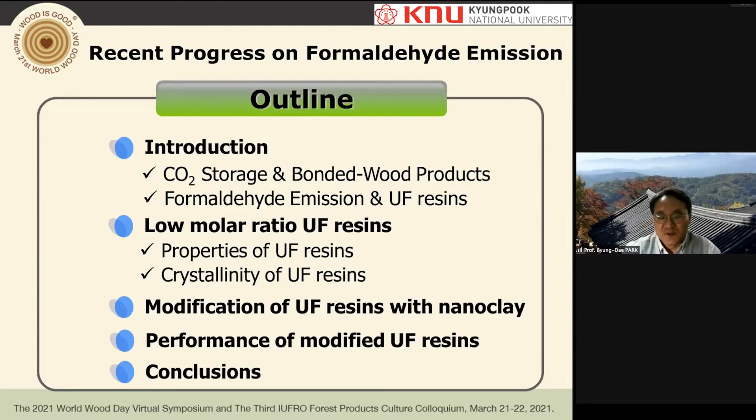Everybody knows wood contains carbon dioxide. This graph shows the net carbon dioxide life cycle emission for different materials, which include wood, minerals, and metals. As you see here, all the metals have much higher carbon dioxide life cycle emission, and minerals are a little bit smaller.

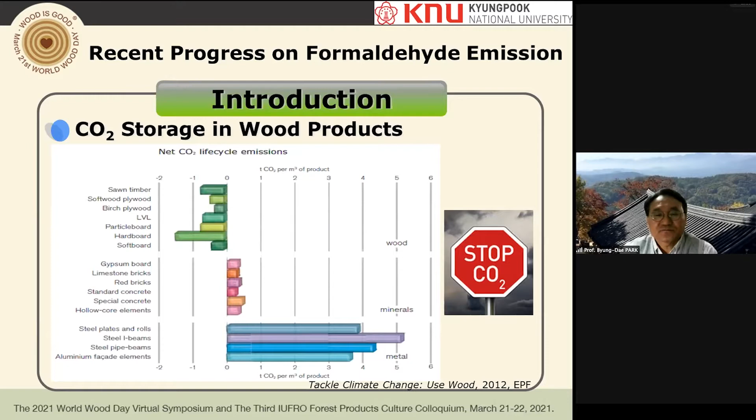But all the wood products, which include sawn timber, softwood plywood, birch plywood, laminated veneer lumber, particle board, hardboard, softboard, are all negative numbers. That means they contain carbon dioxide in these products, which may help mitigate climate change in the future. So why are we still using adhesives?

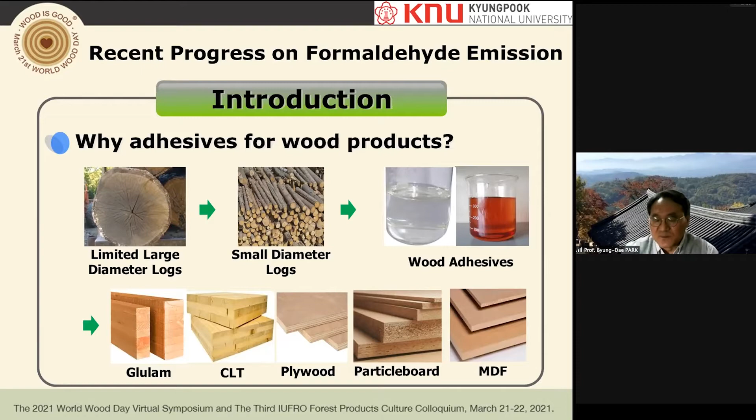As you know, we are limited in large diameter logs, and we have a lot of small diameter logs available for making products. In that case, we need adhesive to bond small pieces together into big products like glulams, cross-laminated timber, plywood, particle board, MDF, those kinds of things.

So where do wood adhesives come from? I guess everyone knows most wood adhesives are based on formaldehyde resins. They are petrochemicals. First, I want to focus on the UF resin, which is a product of reaction between formaldehyde and urea. This is mainly responsible for the formaldehyde emissions.

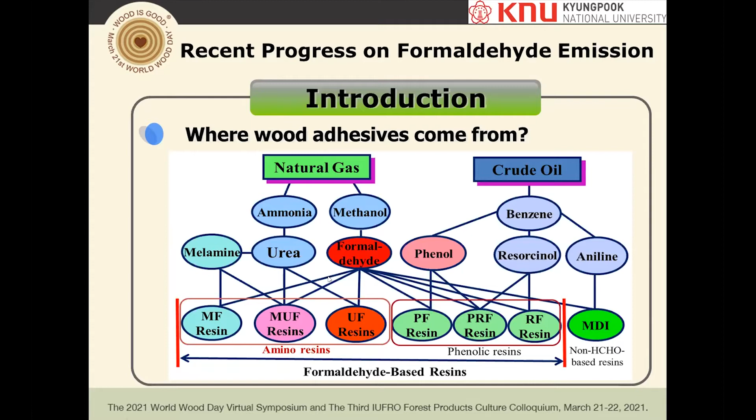As you may know, this UF resin was synthesized in 1884 by Holzer, a long time ago, and then commercialized, and it's been used for more than 100 years. The wood product industry still uses UF resin. Why? Because UF resin has good performance. They have good adhesion strength and also fast curing. They are inexpensive, and also colorless.

But there are some disadvantages. One of the critical disadvantages is formaldehyde emission, as everyone knows. Also, UF resin bonded products have low water resistance and low durability. That's why UF resin bonded products are mainly used for interior applications. Today, I'm going to mainly focus on the formaldehyde emissions of these products.

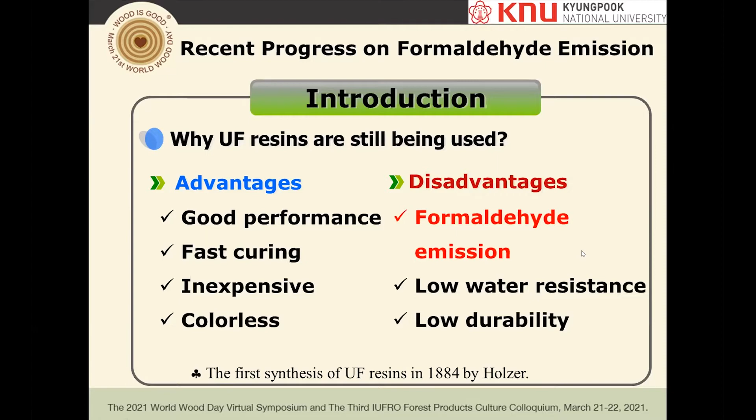As you know, formaldehyde emission goes on a very long time. As you see here, emission goes more than 500 days, which is much longer compared to other volatile organic compounds. There are many different approaches to reducing the emission, including synthesis control, I mean, how you cook the resin, and you may play with the formulations.

You can also have a low formaldehyde to urea molar ratio. Sometimes you can use scavengers, such as dry urea or urea solution, or you can use post treatment chambers like ammonia chambers. But today, I'm going to mainly focus on low molar ratio resins.

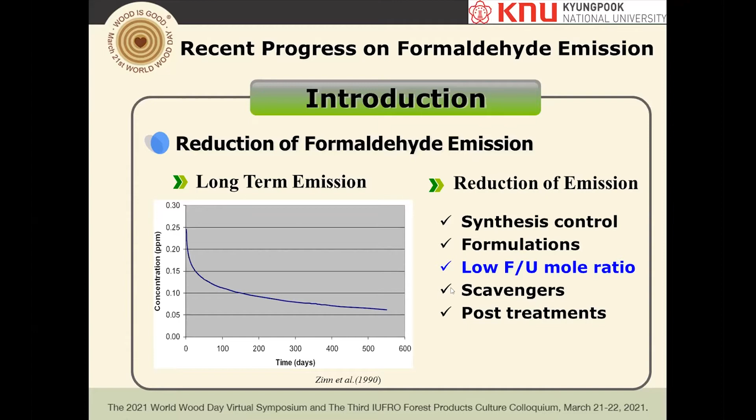What we did is we prepared films of the UF resin and then cured them at different temperatures, for different molar ratio resins. As expected, higher molar ratio gives much higher hardness compared to the low ones.

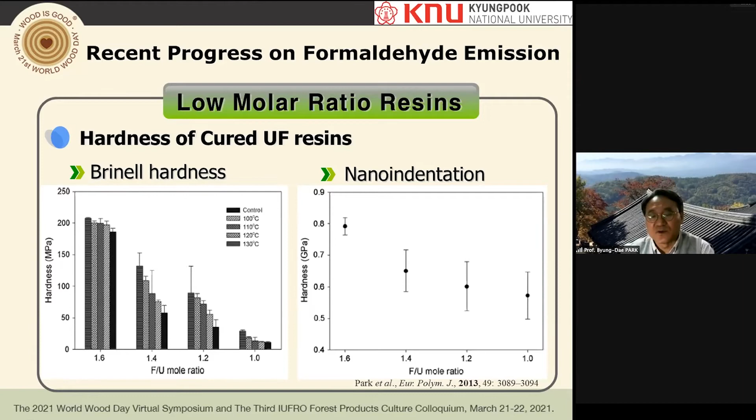Low ones usually have the lower hardness. And then we also did, sorry about that, nanoindentation. I did also nanoindentation on the same films, and then we have the low hardness for the low molar ratios. That means when you have a low molar ratio, you have a low emission, but you have soft material at the end.

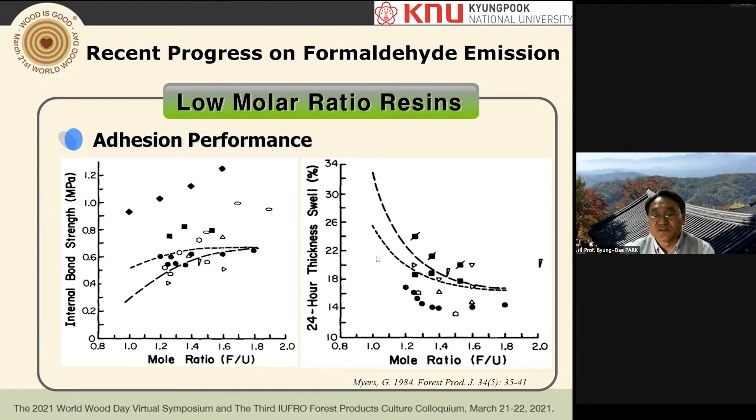And then we look at the hydrolytic stability, I mean, how the UF resins are hydrolyzed at the different molar ratios. So what we did is we prepared the different UF resins depending on molar ratios, and then cured them and then ground them into powder, and then we have different particle sizes, and then put them in the hydrochloric acid for artificial hydrolysis, and then we measure mass loss and liberated formaldehyde concentration after the hydrolysis.

And then we question why, and then we look at the XRD, X-ray diffraction. As you see here, the low molar ratio resin 1.0, 1.2 is much more crystallized compared to higher molar, which are amorphous. And then we calculate the crystallinity of these resins depending on the molar ratio. About 1.0 molar ratio has about 48% crystallinity. That means almost half of them is crystallized, the other half is amorphous. And also the crystal size increases when you have low molar ratio resins.

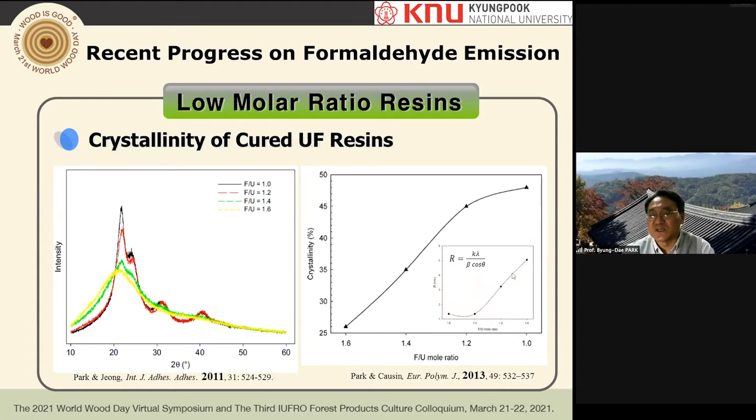And then we also look at the morphology of the cured UF resins by preparing two parallel plywoods using the adhesion between them. And then we split them in half, and then we look at what was going on in the cured resins in the wood. And then we found the different types of crystal structures in these resins in wood.

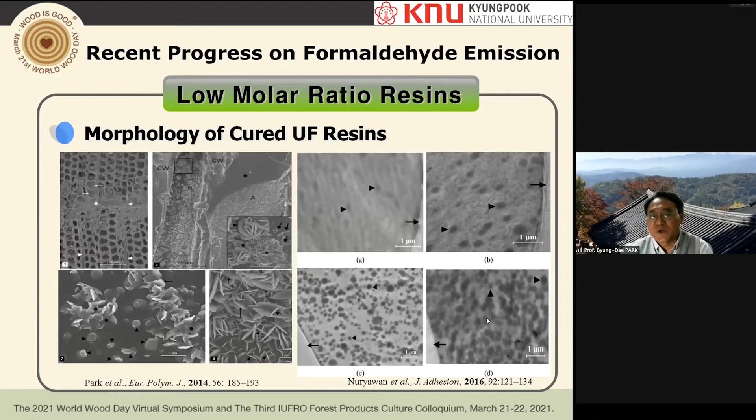And also we did look at TEM. This is high molar 1.6, this is 1.0. 1.0 low molar has much more dark spherical particles. I believe these are responsible for the crystallinity of the low molar ratio resins.

And then we look at these resins with XRD, with wood, without wood. They're pretty much the same crystal patterns, and with wood, a little bit smaller size. And then we also did the electron diffraction, which gives a different number of rings, which means these crystals are polycrystals. I mean, different types of crystals are combined together at the same place.

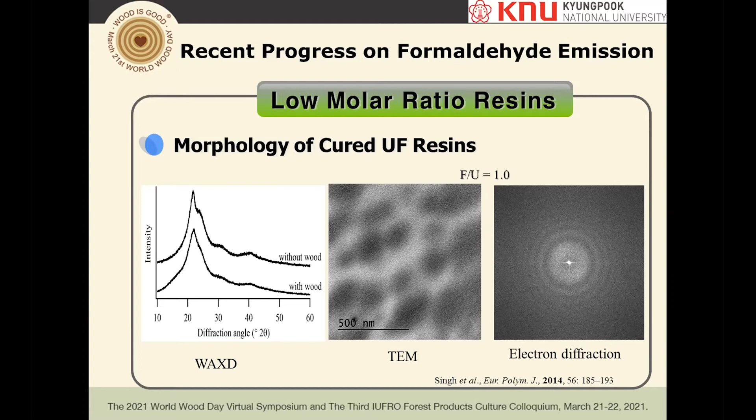So, recently we did the AFM and the TEM to look at the morphology of cured resin. As you see here, left-hand side, AFM shows pretty much the lamellar crystal structure for the low molar ratio resins. We also confirmed the lamellar structure with the TEM. However, the high molar ratio resins are pretty much amorphous, shown by both AFM and TEM. So that means the low molar ratio has crystal structures of lamellar types.

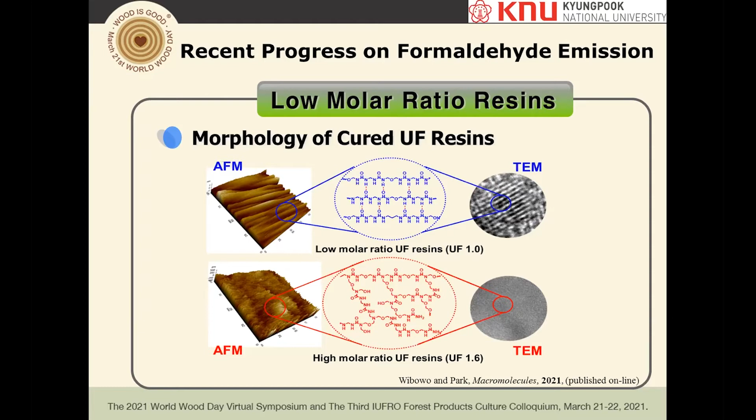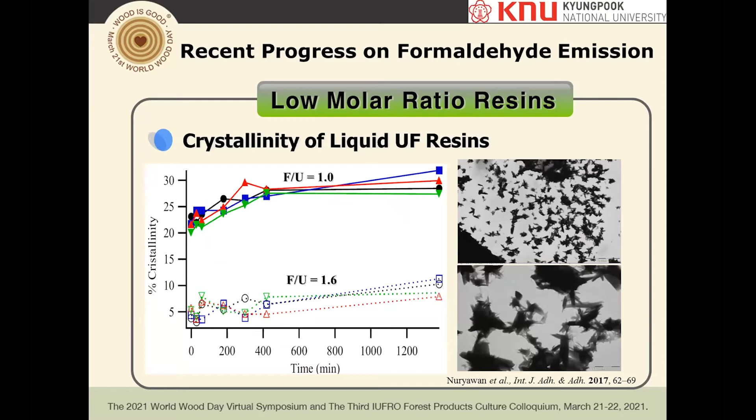And then we also look at what was happening in the liquid resin, and then we look at the XRD for liquid resin. So as expected, the low molar ratio has about 28%, which is smaller than the cured one, but still they have crystallinity. And then we also luckily found the crystal particles in the liquid resins. That means most of the crystals in the liquid move to the cured resin, and they aggregate into much bigger and more crystallized, high crystallinity.

And then we look at what was happening in here with FTIR and proton NMR. And then what we found is, this is NH and this is the carbonyl groups. So compare, the red dotted line is 1.6 and the black solid line is 1.0. So there are some shifts of these wave numbers. That means the NH is moving because of hydrogen bonds between linear molecules in the low molar ratios.

It's the same thing in the carbonyl groups, and also we have the same thing in the proton NMR. So the chemical shifts are moving up here and over here as well. So this means this resin has hydrogen bonds.

And then we came up with ideas like this. The high molar ratio resins are like this, a little bit of branched polymers, but when you have a low molar ratio, it's pretty much linear molecules because formaldehyde is kind of the cross-linker. Less formaldehyde means they have less cross-linkers. So what I thought is we have this kind of hydrogen bond between linear molecules, the amino group NH to the carbonyl groups. This is consistent with FTIR and proton NMR.

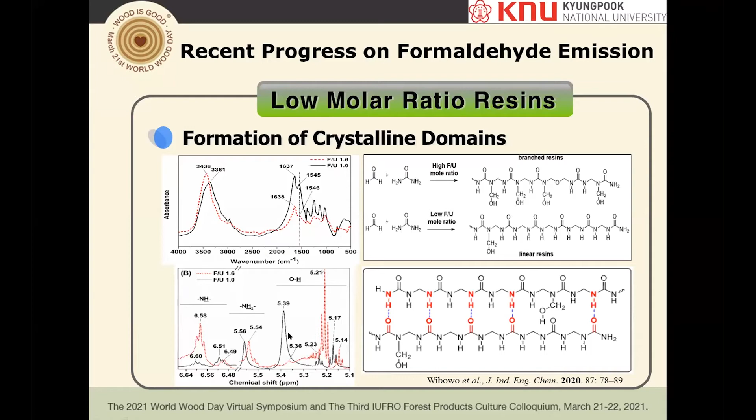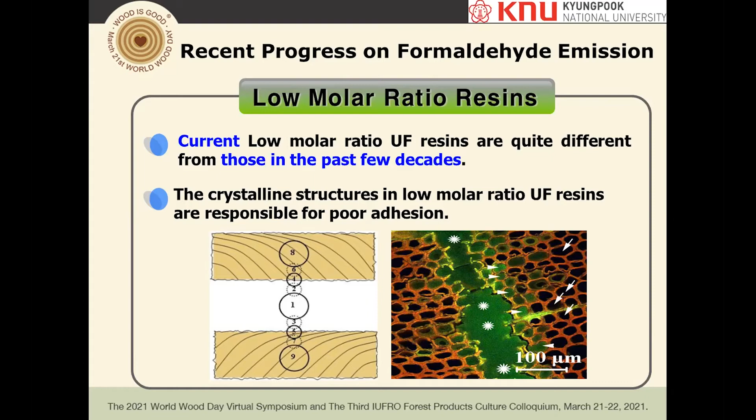So how are we going to do this? What should I do? I mean, what I'm saying is the current low molar ratio is quite different to those resins used in the past few decades. I mean, the crystal structure in low molar resins is responsible for the poor adhesion. What I'm saying is low molar ratio resins have crystal structure instead of building a three-dimensional structure, which gives strength in the polymer. That means low molar ratio has poor cohesion in bond lines.

So the idea is very simple. We try to modify the low molar ratio with nanoclay. As you know, nanoclays are layer structures like this, 1 nanometer thick, and they also have exchangeable ions, which are sodium cations between layers. Once you mix the nanoclays with the polymers, some of the polymers sit between the nanoclay layers, or some of the nanoclay layers are exfoliated.

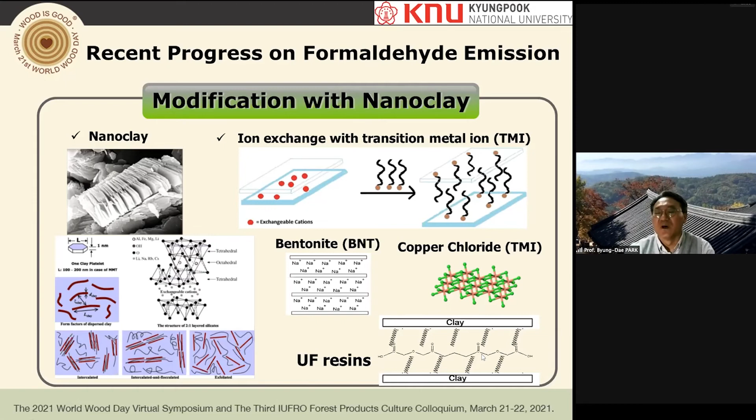So the idea is we want to exchange this sodium ion with a different ion which is bigger, which means the copper chloride. So we have the sodium cation here. We exchange the sodium cation with the copper ions because copper's radius is much bigger than the sodium's. And then we expected a larger distance between the nanoclay layers, and UF molecules sitting between the nanoclay layers.

And then we add the TMI bentonite. That means the transition metal ion modified bentonite, which is modified nanoclay, mixed with the UF resins. Actually, it's cooked in the kettle. When you have 5% modified resin, you have much faster curing detected by DSC. The same thing detected by DMA, much faster than the control. What was happening here? We explained that the copper ions are hydrolyzed and release protons which accelerate the cure of the UF resin. That's why the modified resin has faster curing.

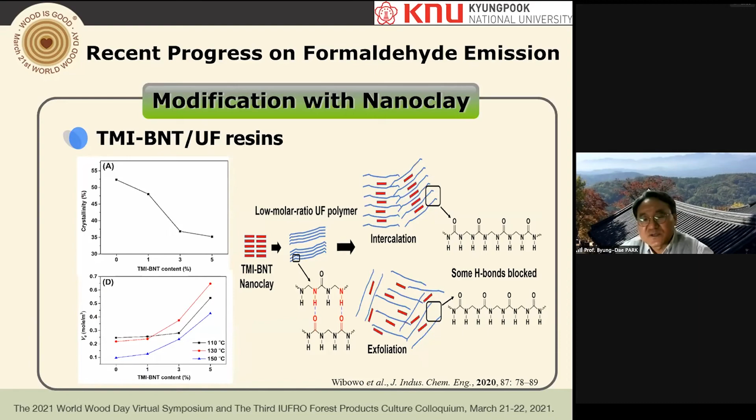On the right-hand side is the schematic diagram of what we thought. We have the lamellar layer structure of the nanoclay and linear molecules of the low molarity resin, with hydrogen bonds between them. Once mixed with the modified nanoclay, which has a larger distance between layers, some UF resin molecules are intercalated between the layers, and some are exfoliated. So some of the hydrogen bonds in the low molarity resin are blocked or prevented, which gives a three-dimensional structure, which I expect gives higher cohesion strength and will improve the adhesion at the end.

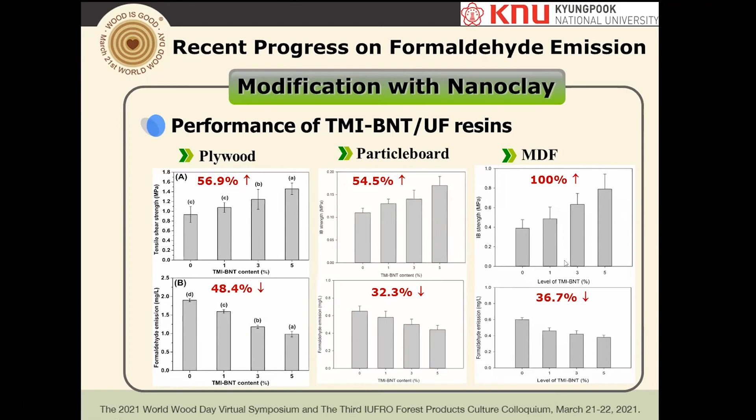So this is what I got from three different wood-based products: plywood, particle board, and MDF. First, the tensile shear strength of the plywood increased about 56% at 5% modified nanoclay. At the same time, formaldehyde emission decreased about 48%. The particle board also has increased internal bond strength, and formaldehyde is reduced about 32%. MDF has almost double the internal bond strength, and about 36% formaldehyde reduction.

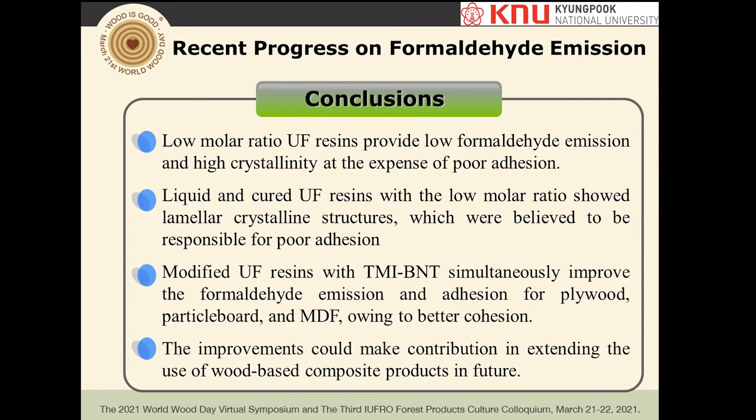So here's the conclusion of my presentation. Low molarity gives low emission and high crystallinity at the expense of poor adhesion. Liquid and cured UF resin with low molarity shows lamellar crystal structures, which are believed to be responsible for the poor adhesion. The UF modified with nanoclay simultaneously improves the formaldehyde emission and adhesion of plywood, particle board, and MDF because of better cohesion compared to the control resin. These improvements could contribute to extending the use of wood-based composite products, which may help mitigate climate change in the future.